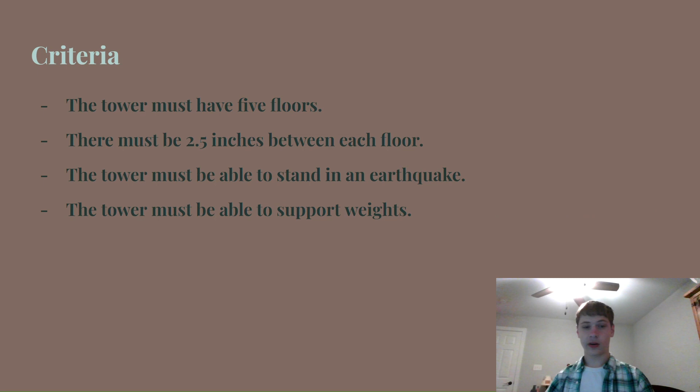Step 2: Generate concepts. My teammates and I needed to start researching different towers in areas especially susceptible to earthquakes, such as California, Japan, and Taiwan. Some of these buildings include the Wilshire Grand Center and Taipei 101. After we studied the engineering of these towers, we took some ideas we liked and put them into our own concepts. Here are some of mine.

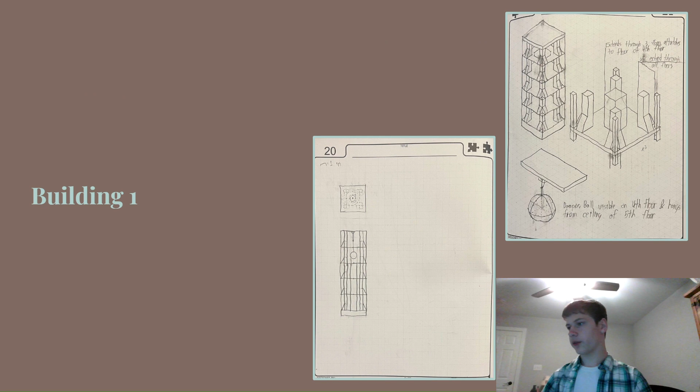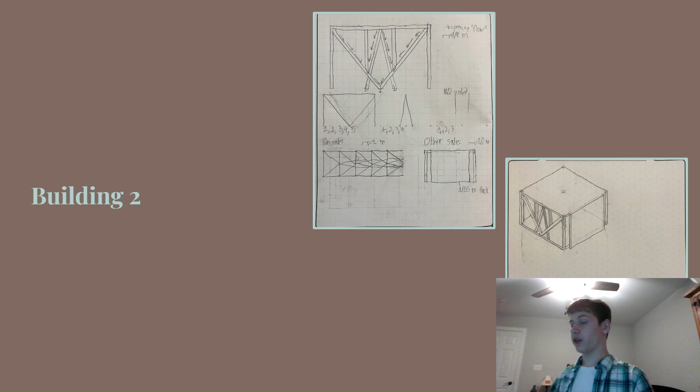The drawing for the base was created after the towers. These drawings were created with building 2 in mind. 4 clips are included to keep the tower in place.

Step 3: Develop a solution. We decided to use my second tower. I designed the tower using computer-aided design software. The clips were added later on and were not included in the digital model.

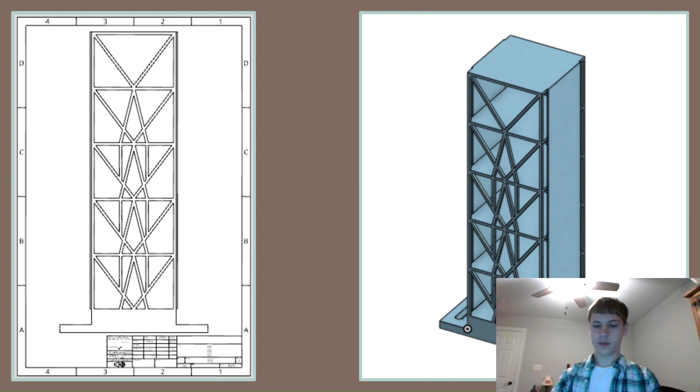Step 4: Construct and test prototype. After creating the CAD model, we needed to create our tower. These are the steps we took.

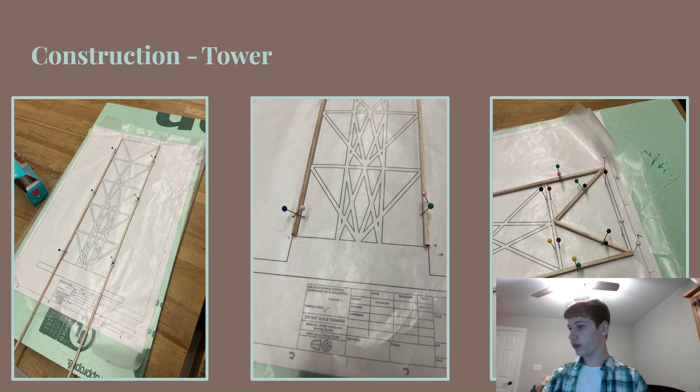Start by adding supports to the sides of the tower, using pins to keep them in place. Then cut the sides to fit into the drawing. Cut more balsa wood in a way that they will fit between floors in a V shape. Repeat until you have these V supports on each floor.

Then cut some balsa wood into pieces that make an A shape. Cut out the areas that cross the V supports. Repeat until the bottom 4 floors have these supports. Then add parallel supports that end at the A supports. Add these to the bottom 3 floors.

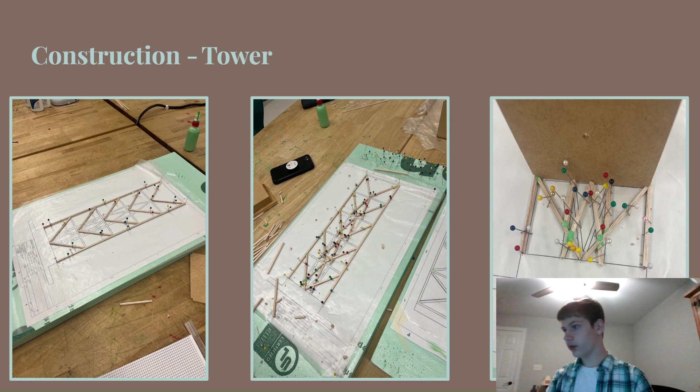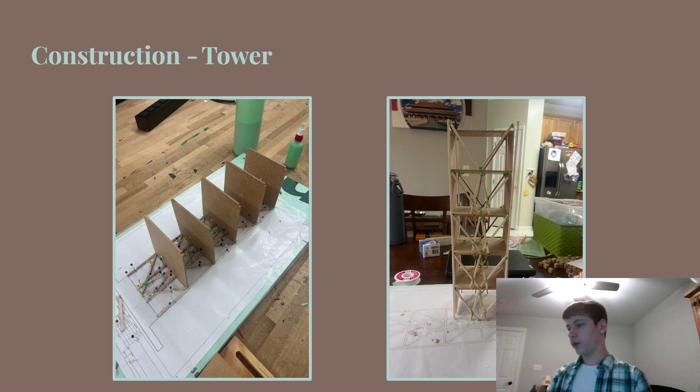Add the floor panels in the empty spaces between towers and glue. Once the glue has dried, repeat the process to have supports on each side. Next, add 3-inch wide shear walls, which run down the entire tower. Add glue.

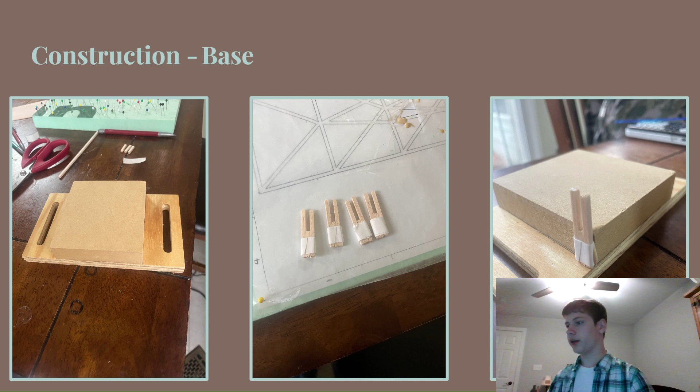Next, the base must be constructed. On the thin platform, add 4 marks, 5/8 of an inch from the shorter edges, and glue the thicker block within these marks. Create 4 clips with short pieces of balsa wood and tape. Glue these so that they extend out 1/8 of an inch from the platform. Add glue between the longer prongs of the clips.

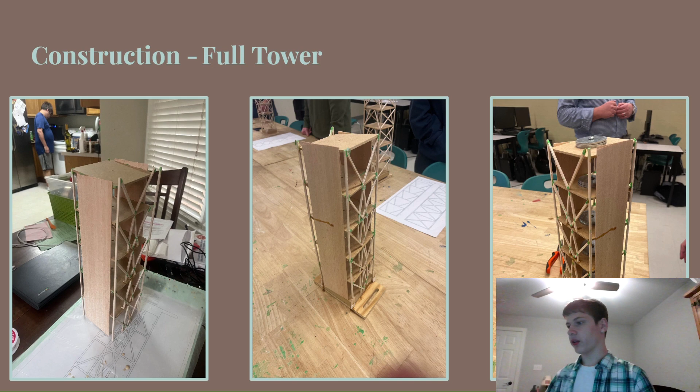Now we can add the tower to the base. Each corner of the tower must fit into a clip. Let the glue dry. Once the glue has dried, add weights and secure them with screws and wing nuts. The tower is now ready for testing.

Here is a video of our test. It is also posted as a separate video and can be accessed in the description.

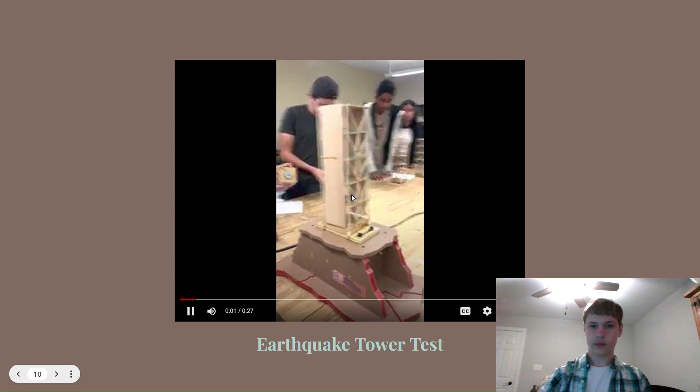Our project's result was not very successful. The building was built very sloppily, and the design might not have been stable anyway. If I were to do this again, I would try a simpler design and be sure that everything is neatly built. Time was also an issue, as we were behind in terms of getting the CAD model completed.

We couldn't waste any time building, so I would be more careful about that next time. But in terms of the team, I tried to take a leadership role for this project. I wasn't the best at it at first, but later on I was able to get my team members to work efficiently. I wouldn't consider this an immediate success, but I feel I learned more about the importance of constructing things well and, more importantly, leadership, as I saw myself being more of a leader both inside and outside of the project. But I also put too much weight on myself. Overall, I'd say this project was not much of a success, but I did learn and build important skills.